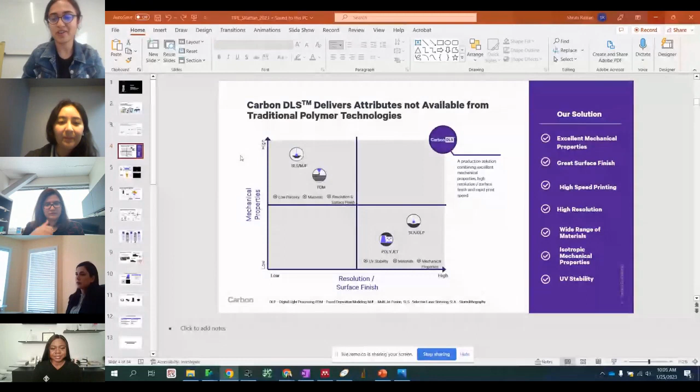Okay, perfect. So, I guess to your question, I just wanted to highlight first what Carbon's unique technology is about. I really like this phase map, which shows the different 3D printing technologies specifically for polymers that are available today. On the left, you see more of the heat-based 3D printing technologies like SLS, FDM, and on the right, it's showing some of the UV curing 3D printing technologies such as PolyJet and SLA.

So essentially, for the heat-based 3D printing technologies, we get good mechanical properties. However, it has some limitations related to porosity. Also, we're limited by the lowest feature size that can be achieved because the nozzle diameter can only be so small, and the size of the bead generated cannot go below a certain length scale. Whereas for UV technologies, although you can print a nice 3D printed part, it can be limited by good mechanical properties. More often, these UV cured polymeric parts are brittle, and they also lack good UV stability.

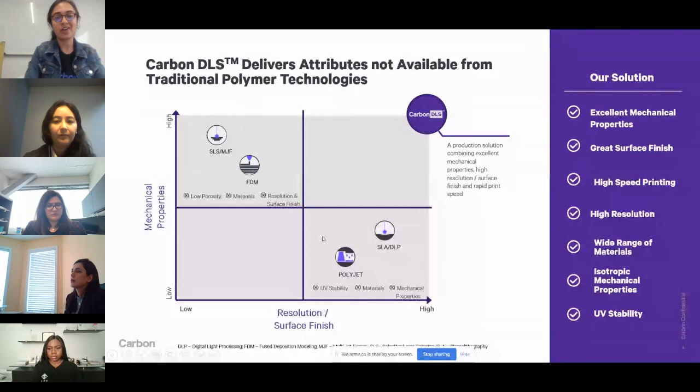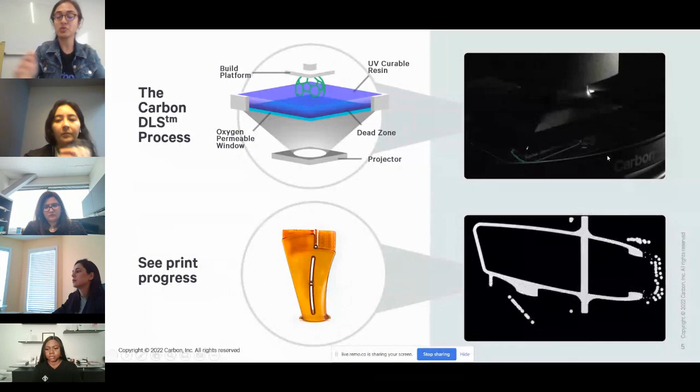So Carbon's technology works at the intersection of UV curing and thermal curing. If I go to the next slide, this process shows how Carbon's 3D printing works. We have a platform which is lowered into this cassette, essentially a reservoir of UV curable resin. And we have sophisticated digital optics at the bottom, which project UV light into a sequence of images.

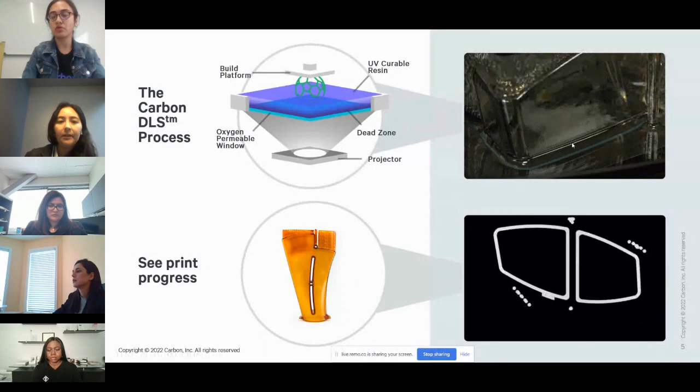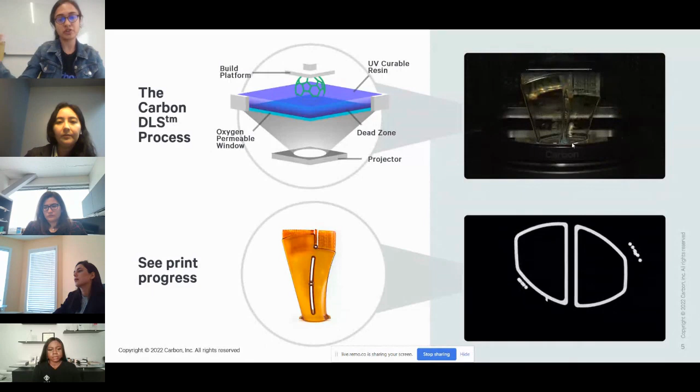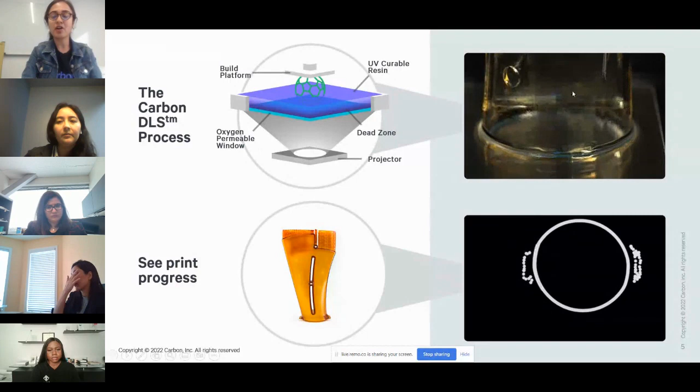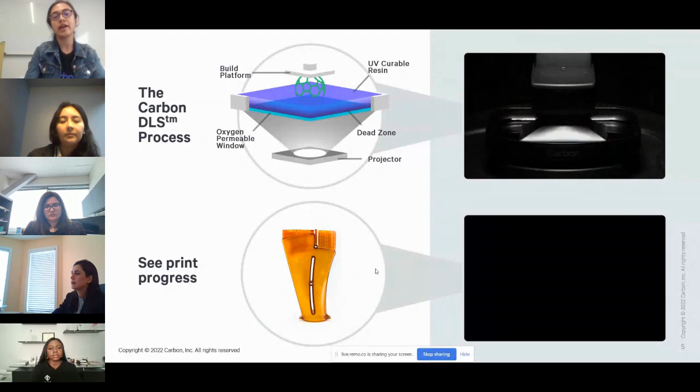Our 3D printed part is cured, UV cured as the platform is raised from the reservoir of liquid polymer resin, and it cures into this green part, which at this stage still does not possess the mechanical properties demanded of engineering and functional grade materials, such as those from injection molding. So one of the unique features of our technology is that we take out this green part, which has been 3D printed, and then it's baked in an oven. Then it's thermally cured, and finally we get this 3D printed part, which has unique mechanical properties. It's strong, it's tough, it's durable, it has good surface finish, and also isotropic mechanical properties.

Once the part is removed from the 3D printer, we wash it and spin it, and then it is ready for the second step, which is the baking step. This activates our thermally curable chemistry, and then we form what is an intertwined polymer network of UV cured polymer network as well as a thermal cured polymer network, which gives the final 3D printed part really good mechanical properties.

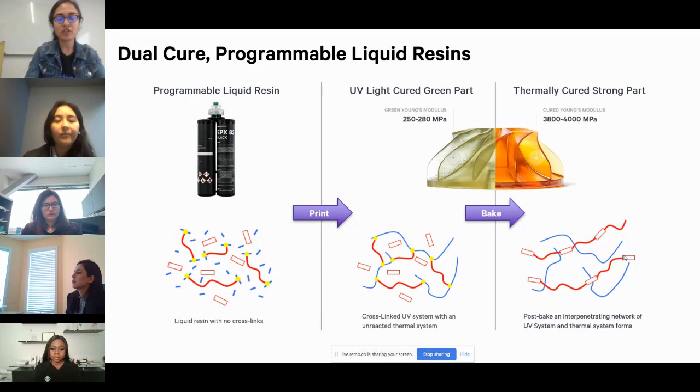This is what is unique about Carbon's technology, and it has led us to develop a wide variety of materials, ranging from rigid polymeric materials, some comparable to traditional thermoplastics like nylon or glass-filled PBT, possessing high functional toughness, temperature resistance, and flame retardance in certain cases, used in automotive parts, housings, and a variety of other applications shown below.

I've most recently been working on the elastomeric side of things, more rubbery, stretchy materials. We have a wide range of elastomer materials based on their energy dampening, energy return, and impact absorption properties. One of our most famously used elastomers is in the midsoles of

Adidas's running and functional performance shoes. Then some examples from the medical industry—I'd like to talk about the nasal swabs that were developed when the pandemic hit us a couple of years ago, again using Carbon materials.

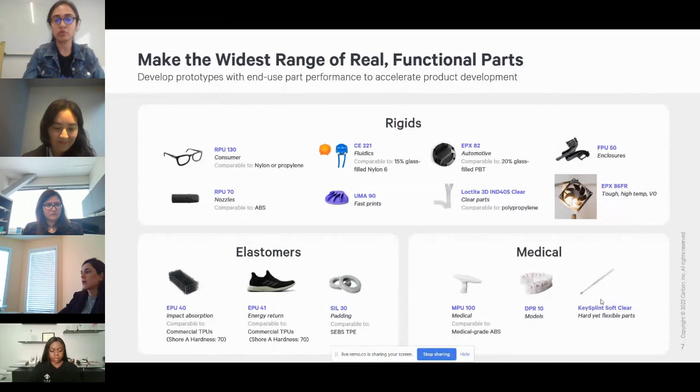We also have a unique software feature called the design engine that enables us to generate lattices of different designs. Using the same material, the software computationally changes the geometries of the lattices, which can generate different mechanical properties based on end-user specifications and product requirements.

I think it's worth highlighting some of the successes we've had with our partners. What's very exciting is how 3D printing has taken the road from functional prototyping all the way to mass production—bicycle saddles, helmets. In fact, this weekend we'll see some of our NFL players wearing helmets using Carbon's DLS technology.

We have Osprey backpacks, again the midsoles, running performance shoes, and gloves. So I hope this gives a flavor of some of the different materials that Carbon's materials team, as well as all the other teams working together in Confluence, has brought about.

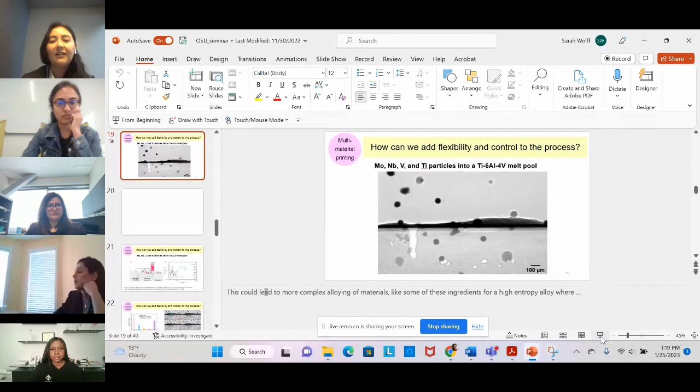So like I said, in a lot of my work I use real-time imaging, so process monitoring during the process. There's a lot going on here, but what's happening is we're actually using a laser moving from left to right to melt metallic particles.

These particles, as I mentioned in the first question, we're depositing different elements into a melt pool, a liquid pool of metal. We're depositing molybdenum, niobium, vanadium, and titanium. The reason we want molybdenum and niobium is they're your refractory, high density, really harsh environment type of elements.

But vanadium and titanium are also high strength, and they provide a lot of that lightweight material quality.

And if you can probably see in the bottom there, these little white bubbles, those are pores. We didn't initially know how to control this, it was just like, let's try and see what it looks like during the process if we can actually melt them. But we could see we're creating these bubbles, these pores. Most of the time you don't want those pores, but if you're lightweighting a material, maybe you do want air bubbles or air pockets that are far enough away from the surface so they don't cause issues when a part is in use.

And then they're just air, they create this lightweightness to your material already. So another example is, let's say you want to create a lightweight but tungsten nuclear reactor wall. These are all nuclear applications, but same harsh conditions as you'd see in aerospace, or now with climate change getting worse. So can we create a tungsten part that's 3D printed but has a lot of pores inside that we can design for, so it's still lightweight? It's a high Z, high density, harsh material, but it's still lightweight, even though it's usually the heaviest type of material. This is really interesting for micro reactors that the government's really interested in for nuclear energy.

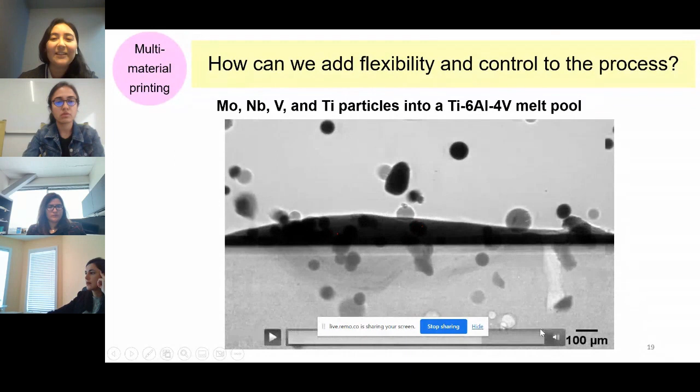So those are some examples. It's usually pretty tough, and you need a good framework for how to implement the properties you want at the end, and then how to design that with the process. There's a good question in the Q&A about the chicken and egg problem with process and the material you want. Sometimes you have to figure out ways to manipulate the process to create these bubbles for lightweightness, and sometimes they're accidental, like I just showed you, but you can figure out ways to manipulate them. That's more of the metal side, and I'm sure on the polymer side it's maybe similar but also a very different design process. I look at the properties needed first, or even the application, and then move backwards.

Thank you so much, Sarah. We want to move back to Shruti. We want to understand what are some of the biggest challenges faced by the industry in translating the innovations created in the labs to large volume production. It would be great if you could share a bit about that.

Yeah, definitely. Thanks, Addie. In my academic research, I've been in chemistry labs in academia, and even here in industry, we start at the lab scale with small cups where we're making our new polymeric resins, mixing them manually or in very small equipment or mixers, and testing our formulations in terms of properties, whether we'd be able to achieve the targeted chemical and mechanical properties ideal for printing. But when we have to scale to mass production, we have to move from cups to drums to totes, and this entire workflow from lab scale formulation to high volume production has lots of challenges involved.